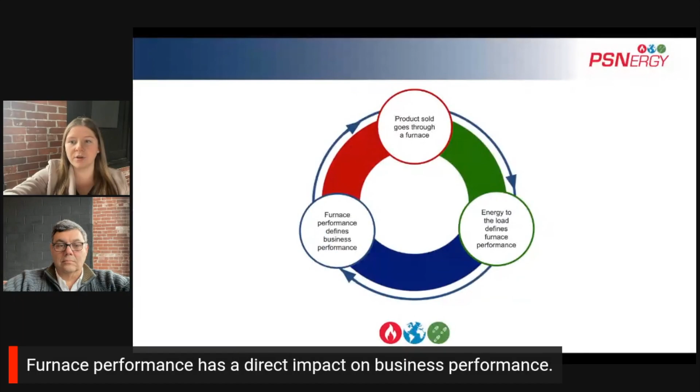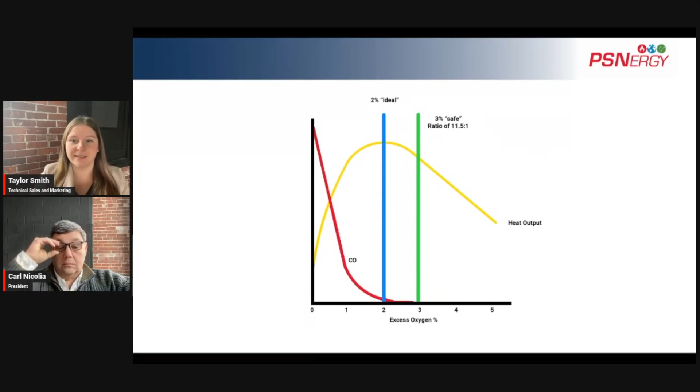So theoretically, you would want to operate the process at a 10-to-1 air to fuel ratio, which would result in 2% excess oxygen. And that means that all of the fuel, usually in most cases it's natural gas molecules, would find enough oxygen molecules and combust, leaving extra oxygen in the exhaust. Yeah, and that works really well in ideal conditions. However, what we've experienced is that in industrial environments where equipment is not brand new, filters may not always be clean, running at those ideal conditions actually puts the process at risk of going rich.

And going rich means having fuel molecules that have not found the oxygen molecule partners to combust with, which results in making carbon monoxide, and it also results in making much less heat output. The one thing we know for sure, combustion systems work at very high temperatures and they're constantly degrading. So leaving room for air is really a good idea, which is why the industry standard is to operate closer to an 11.5-to-1 ratio, which results in that 3% excess oxygen in the exhaust. And that's shown as the green line on the graph.

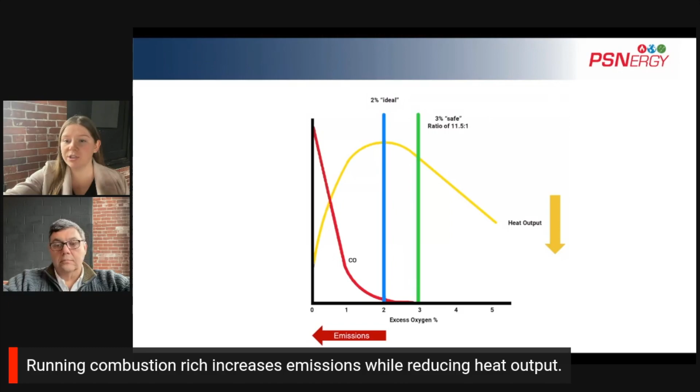Now, what happens when we operate combustion rich or below that 2% excess oxygen level? Emissions increase and heat output decreases. And you can see from the graph, the amount of CO produced rises very quickly as you approach 0% excess oxygen. And when you get to 0%, there are actually raw fuel molecules that are not being combusted at all. So it's great that you can see it on the graph, but how do you know in your operation that you're running rich without equipment to monitor excess O2?

A few easy indicators of running combustion rich are smoke coming out of the exhaust, CO alarms going off, black soot covering the furnace, the rafters, and equipment, or in some situations, fire out of the exhaust. So if you see these conditions, it's very likely that your process is running below 1% excess oxygen. And poor combustion can occur in radiant tube and open fire processes.

So how does running combustion rich impact the business? The safety implications are obvious. Ambient CO is a major problem, and creating more emissions per ton goes against all of the corporate commitments for environmental improvements that most of our customers have made.

From a quality perspective, the more these tubes clog, the more inefficient the process becomes, which means we're not getting the right amount of energy to the product. So this can cause temperature uniformity issues within the furnace and product quality issues. From a delivery or a productivity standpoint, making less energy with the same amount of fuel means that you may have to slow down the process to achieve the right material properties.

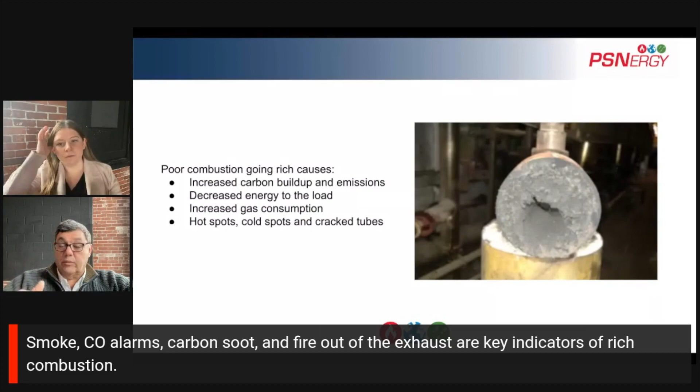And lastly, from a cost perspective, buying natural gas and turning it into soot instead of energy to produce the parts you get paid for is a problem, not to mention the impact this poor combustion has on reducing equipment life. Right. So when you run a combustion process rich, we make more emissions, we risk quality failures, we ship less product, and we spend more cash doing it.

So now that we covered what happens when we burn rich with too little excess oxygen, let's discuss the implications of burning lean, or above, let's say, 4% excess oxygen. So let's go back to our graph. And as you can see, as the excess oxygen increases from that industry standard target of 3%, the amount of heat output is on a steady decline and really drops off significantly. The same amount of gas is being burned, but because we're putting too much air into the mix, we're not achieving the same heat output.

Maybe you're seeing increased ramp cycles in your batch process, or maybe you aren't able to consistently reach zone temperatures in your continuous process. Those are simple indications that you may be running combustion lean. So you may be thinking, well, my furnace controller takes care of all of this, but really it doesn't. The controller only asks for heat or not based on temperature in the furnace, and temperature is dependent on combustion.

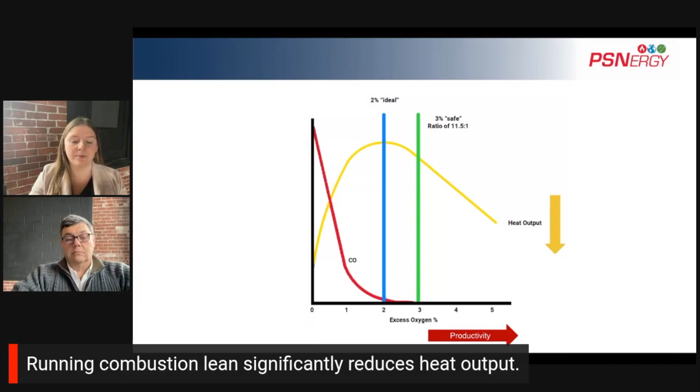So if you're running combustion too lean, you're burning the same amount of gas, but not getting the same amount of energy to your products. So to overcome this, your controller will continue to ask for more gas to make the energy needed to heat the product. And ultimately, furnace efficiency and productivity significantly decrease when combustion is running lean. So let's quantify that by looking at some data.

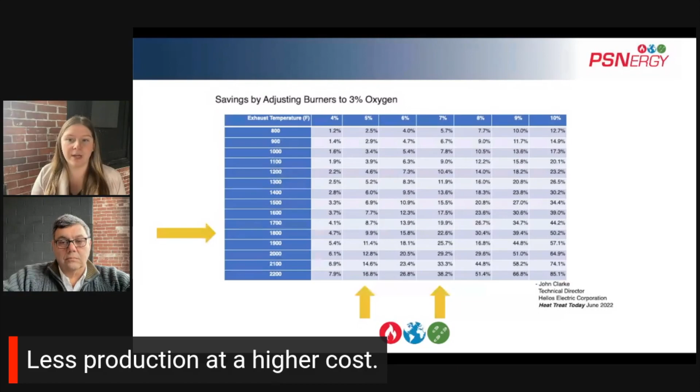The negative business implications of running combustion lean are super clear. You're producing less for the same cost, you're taking longer to produce the same amount, and you're using more energy, creating more emissions, and it's all for more cost. Yeah, that's right, Taylor. And it's not uncommon for us to find burners operating at 0% and even as high as 10% excess oxygen. In either case, the financial impact on the business is really significant.

So regardless of your monthly gas spend, and we have customers that are spending $400,000, even up to $1 million per month in gas on very large furnaces, wasting 10 to 20% of that spend monthly really adds up quickly. So think about wasting $100,000 a month and getting less output and poor quality and more emissions. And again, it really doesn't matter the size of the furnace or the size of the operation. The impact on your business is still very significant.

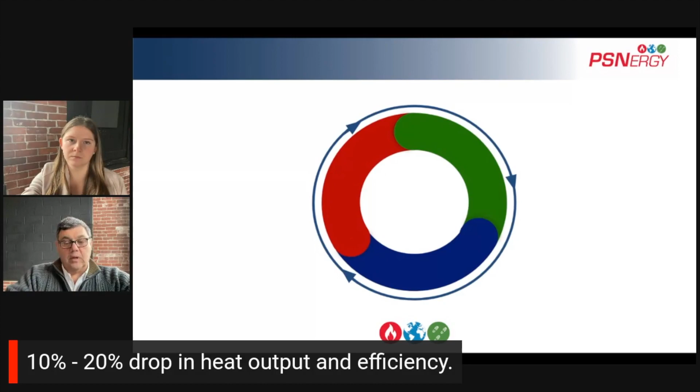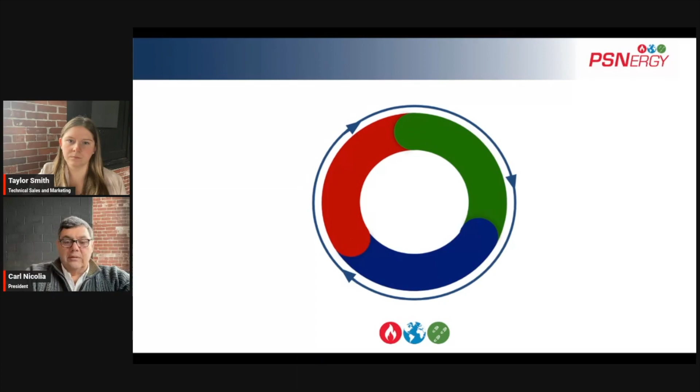So to wrap up, combustion performance is really not about, well, the furnace is running, it's hot, the flame looks right, or this is how we've always run this furnace. There really is an optimal way to run industrial furnaces, and there are very real safety, quality, delivery, and cost implications to the business when you operate with poor combustion.

So combustion performance delivers furnace performance, and furnace performance delivers business performance. Good combustion matters in very real and tangible ways to your business.